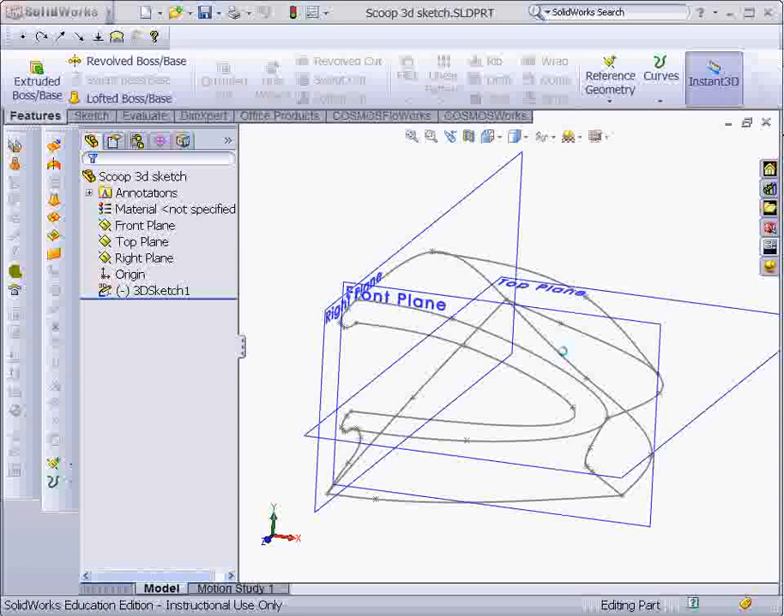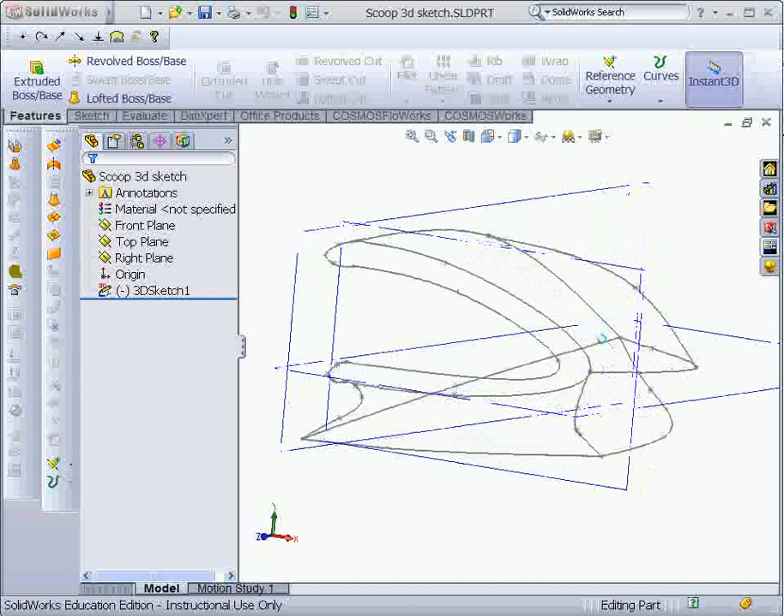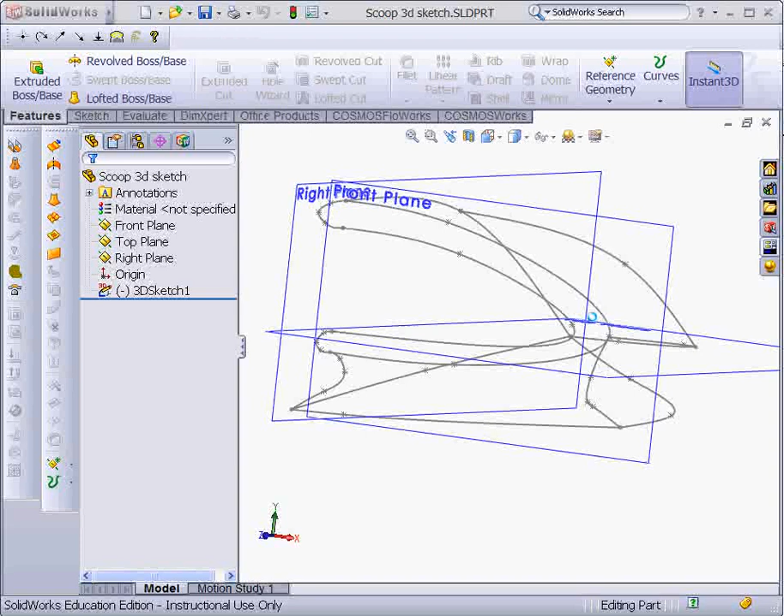We're going to go through the process of creating a surface body from the sketches in the 3D sketch part for the scoop. So at this point you should have created several 3D sketches. With surfacing, there's an art form to this. What we're looking at here is basically a 3D sketch that has half of the final hood scoop form in it. And we're going to use this sketch to create a bunch of closed sketches, and then we're going to use the surface fill tool in order to generate the surfaces.

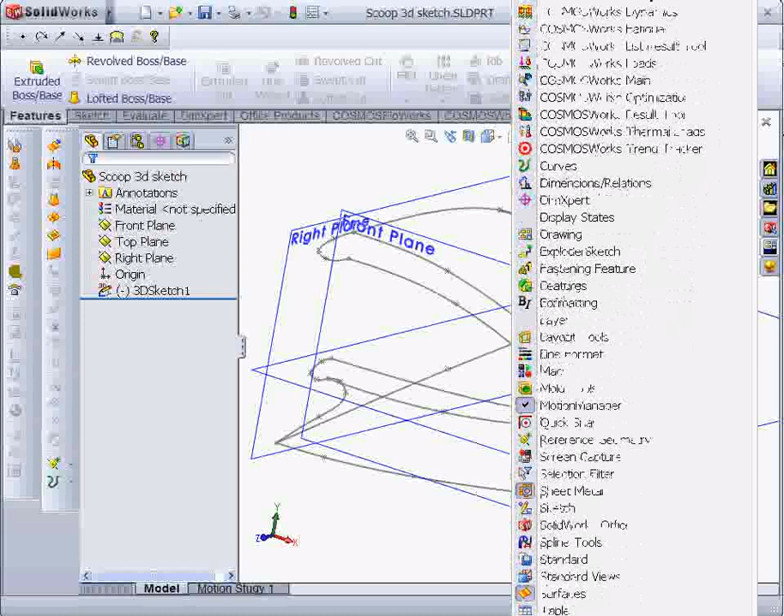So my surface menu is turned on over here. If you don't have that, you want to right click up in the menu area and scroll down. At the bottom there'll be an arrow that you can adjust, and then there's surfaces. You want to have that toggled on. That'll put the surface menu over here. This filled surface tool is the tool we're going to use to do most all of this. We'll then use the knit tool, which is not available to us now because we don't have more than one surface.

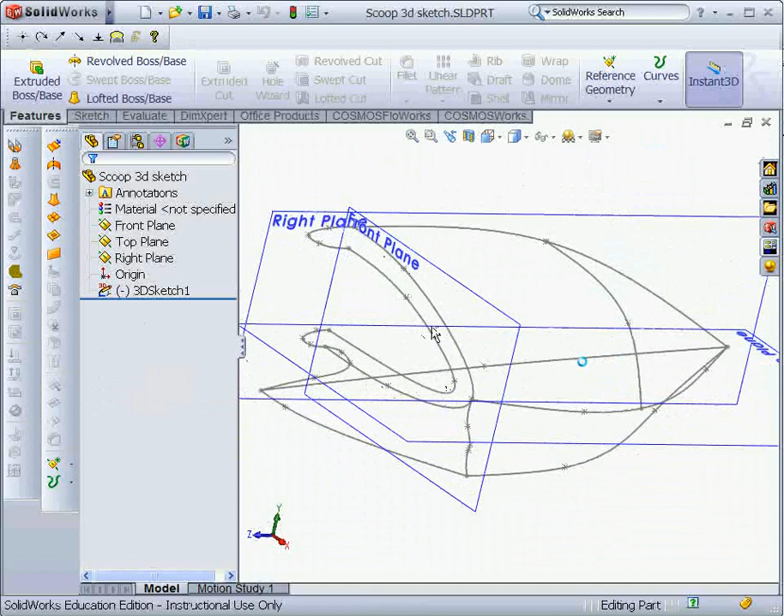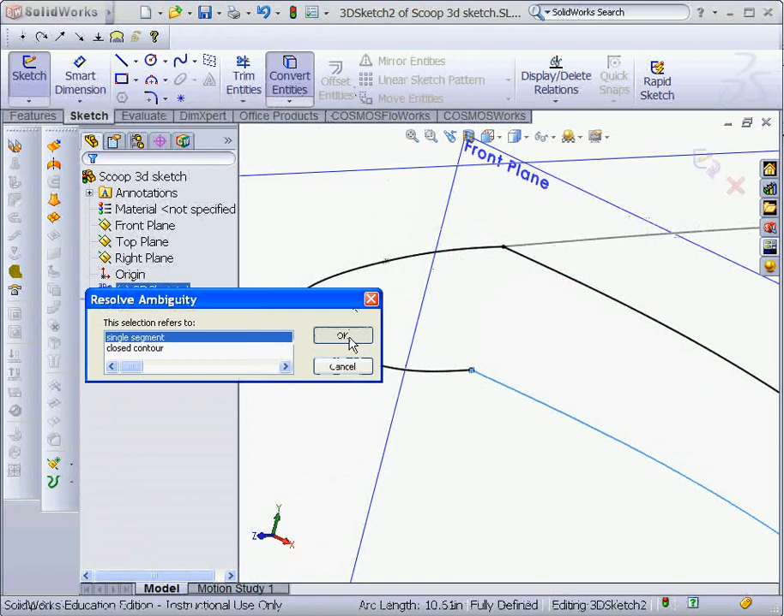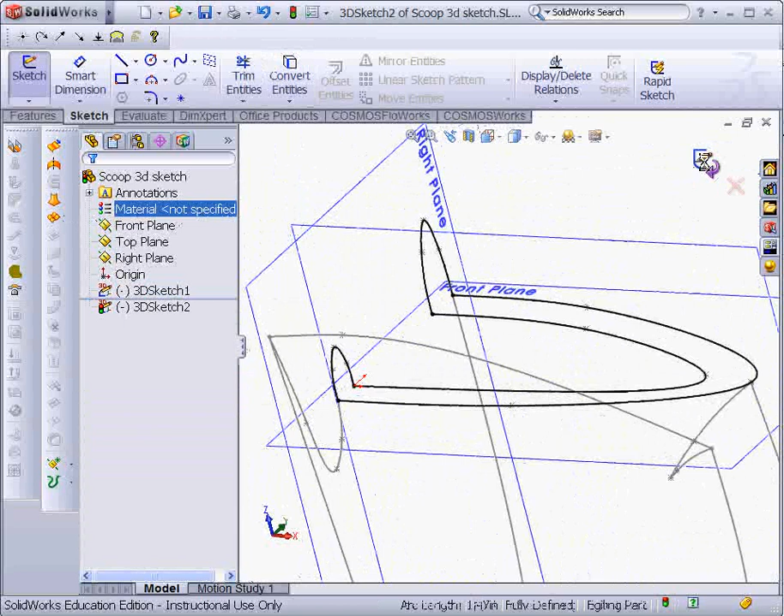So for each surface we're going to create a 3D sketch that bounds the surface that we want to use. So the way I'm going to do that, I'll come up here, get sketch, select 3D sketch. Then I'm going to use the Convert Entities tool to bring the sketch entities into the 3D sketch that I want. So right now I'm going to do the rim around the mouth of the hood scoop. So notice I just did single segments there instead of it trying to do the entire contour. So I have one single closed contour. I'm going to exit the 3D sketch. Now if you notice, I have two 3D sketches over here.

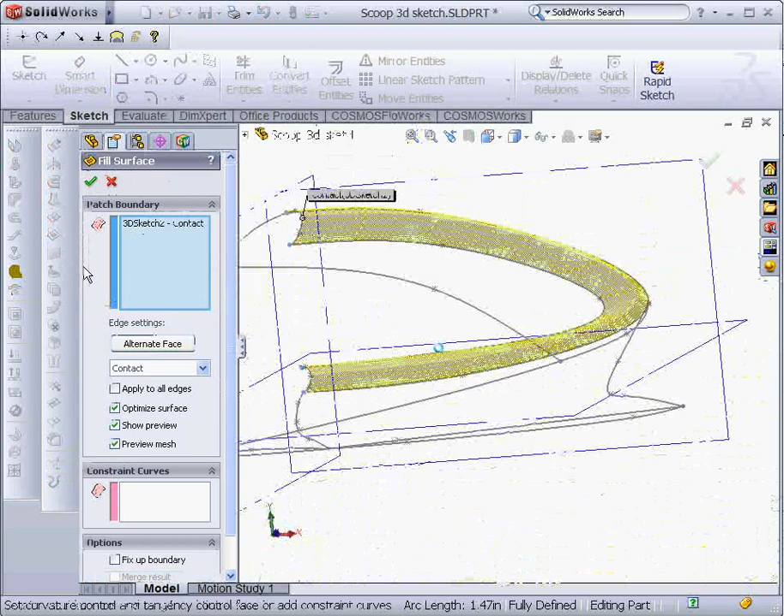With the second one selected, I'm going to click the fill surface icon. It'll take a moment because SOLIDWORKS is fitting a surface to that. And basically what we have there, if you can imagine kind of folding a piece of paper and then bending it in half, we've created that surface. SOLIDWORKS basically maps the surface out using these end contours and the sides. So we're going to check OK on that, and that's the first surface we've created for this part.

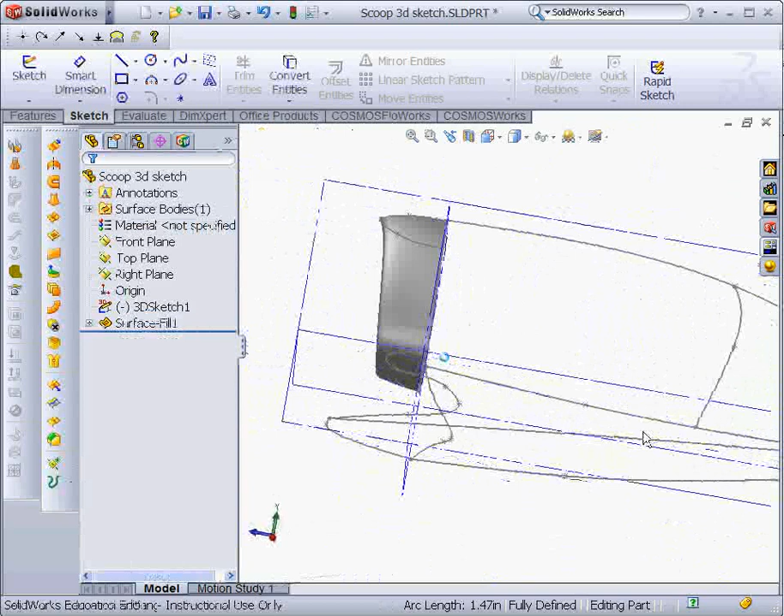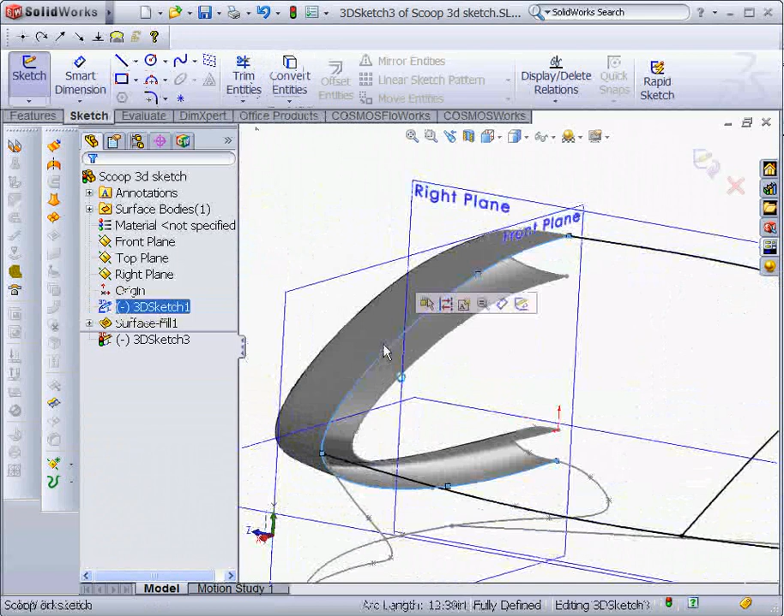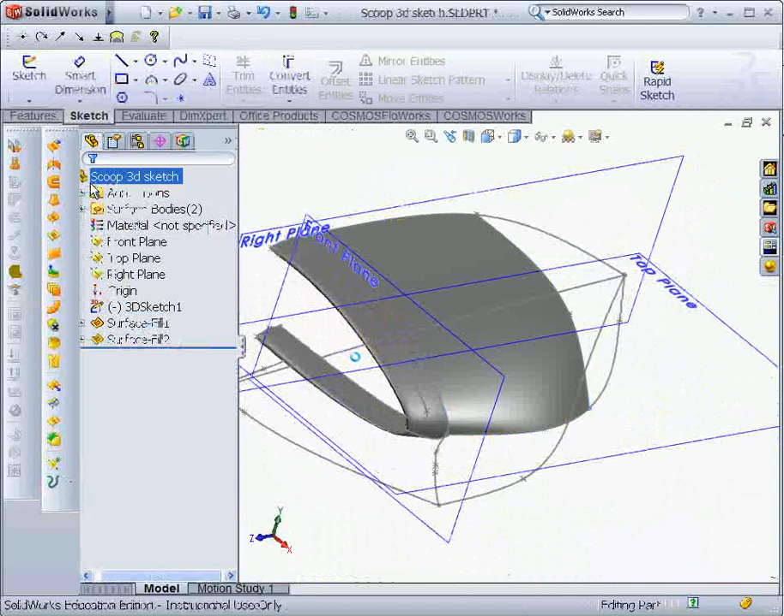The next one I'm going to do is this top surface here. So the way we're going to do that, we just continue this through the part. We're going to go to 3D sketch. I'll click on that edge. Convert this edge. Convert this edge. And convert that edge. And trim those out by clicking on them. Leave that. Click again, and you can see more of that surface is put in. So now I have two surfaces. If I click on the surfaces, they show up as two different surfaces over here in the feature tree.

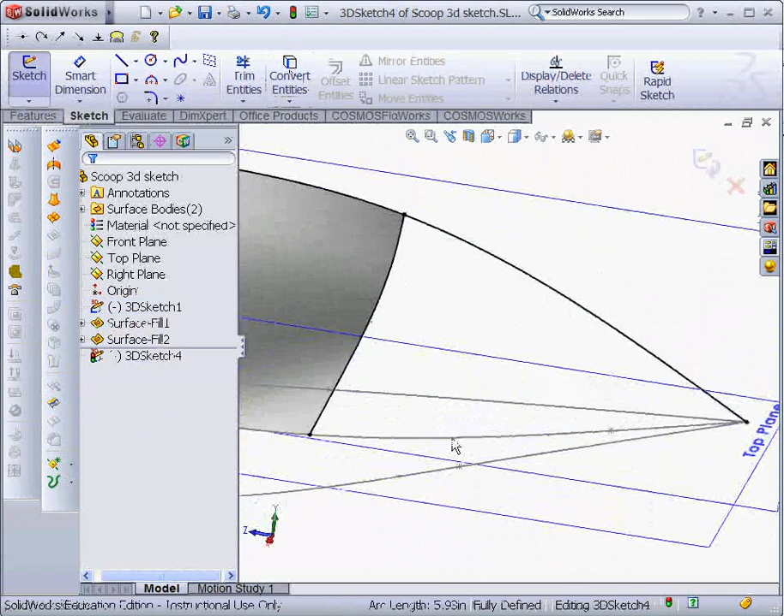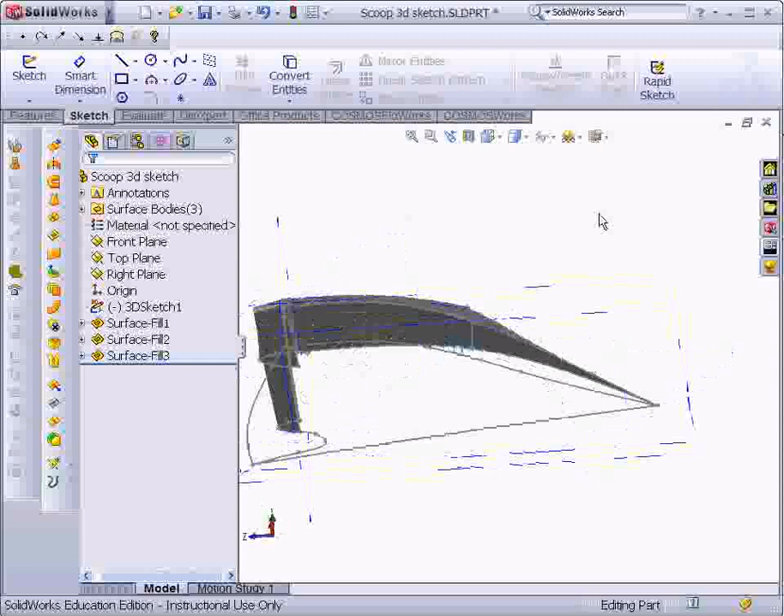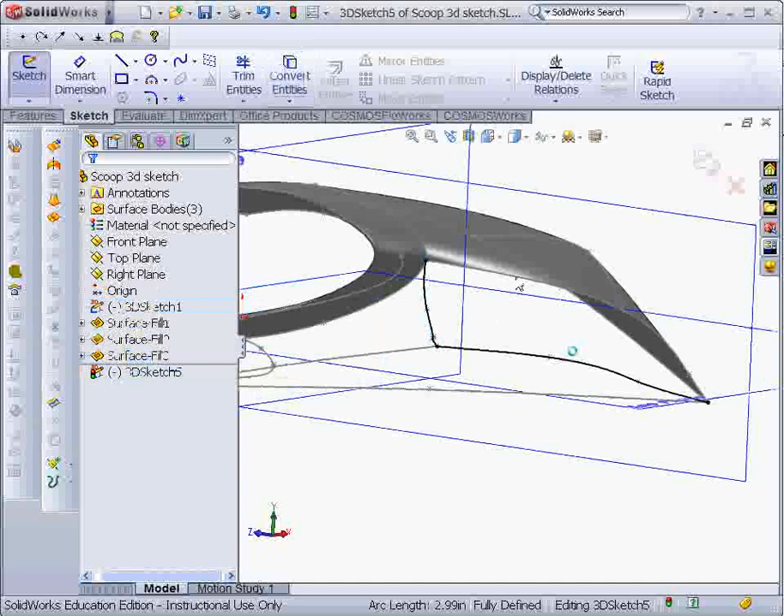This last surface, put it in the same way. Exit out, hit the fill surface icon, and then we fit a surface to that. So now we have three. Two or three more and we'll be done. 3D sketch. Convert each of our segments again. They're all converted. Leave the sketch. Do our fill surface.

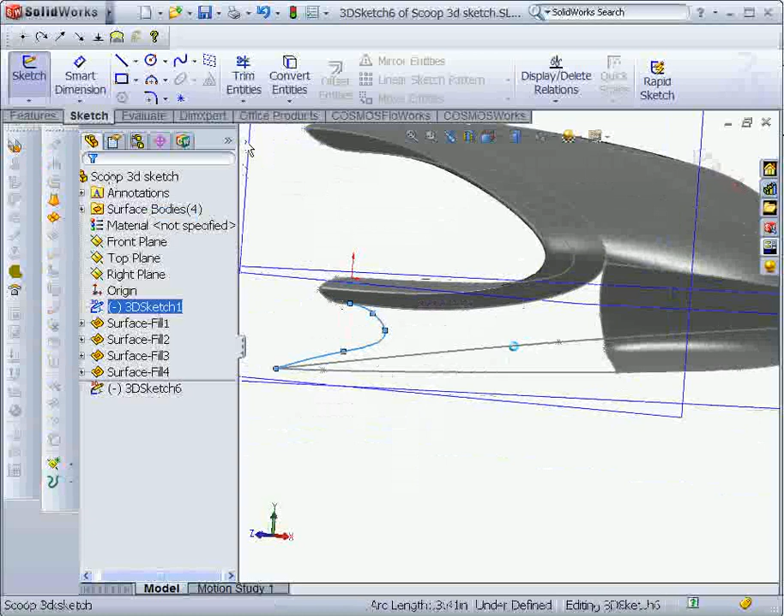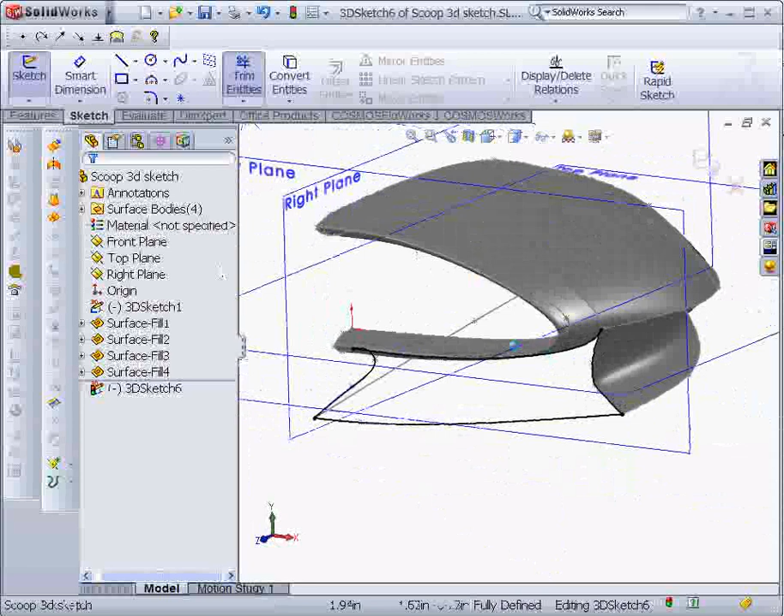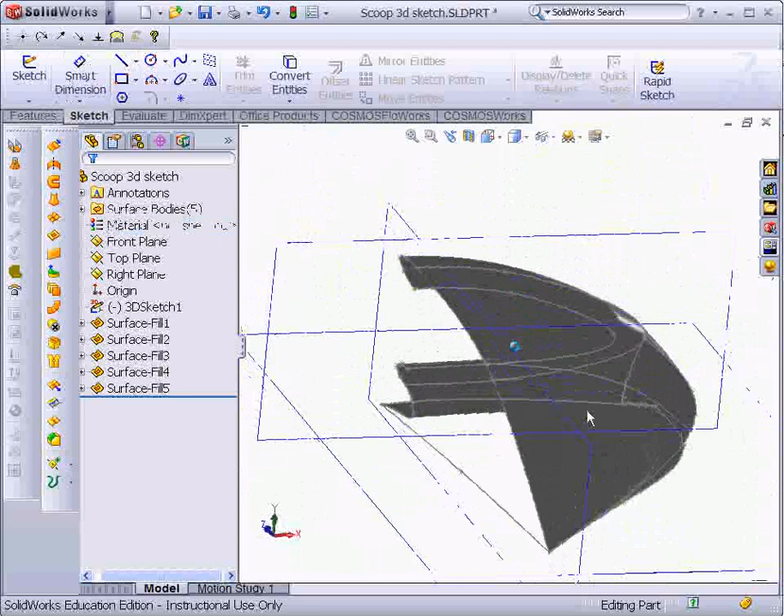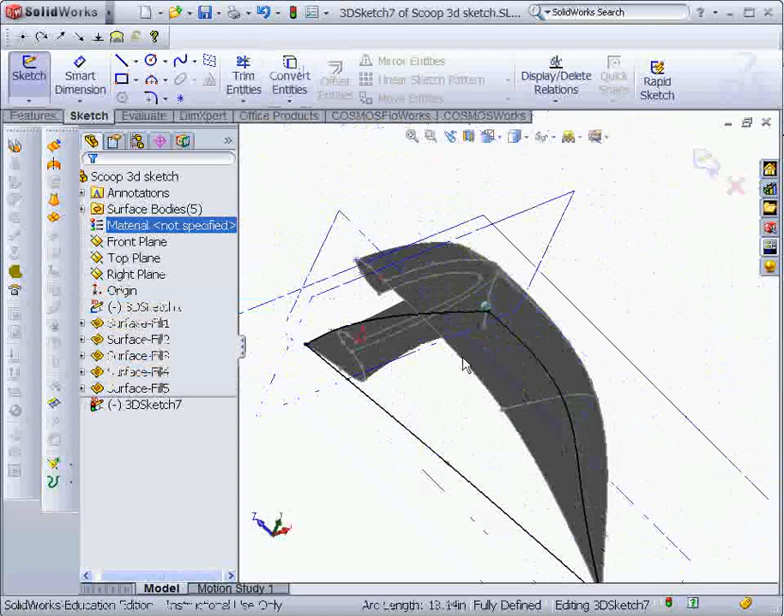3D sketch again. Trim. Everything should be good with that one. Leave the sketch. Fill. And you might think you're done, but we're going to do the bottom as well. So for the bottom, we want to do 3D sketch, convert, convert, convert, leave that, fill that in. So that's complete.

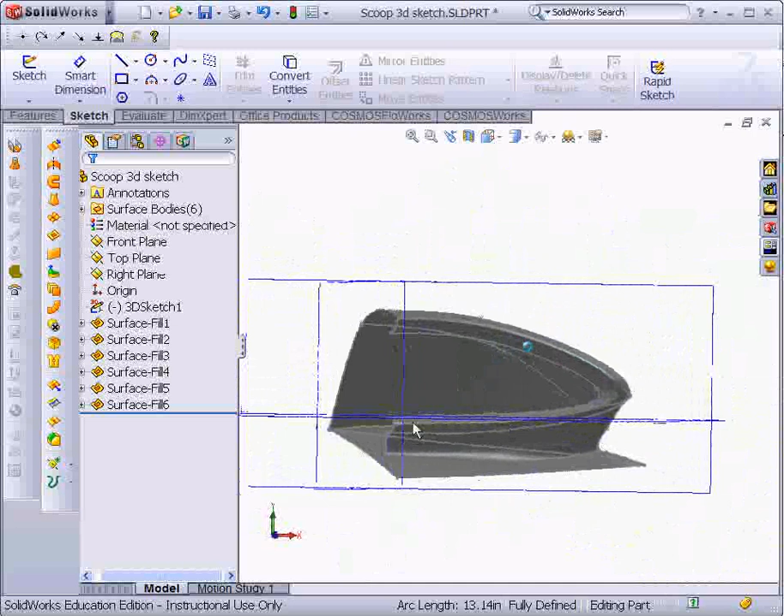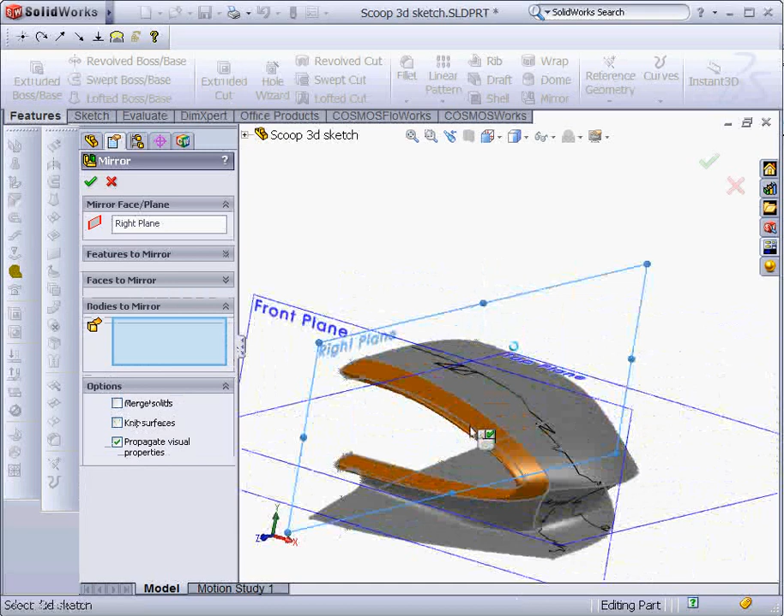Now, I have half of this. I have a whole bunch of surfaces, and I want to get the other side. So I'm going to go to Features, Mirror. I'm going to select this plane. Then I'm going to go to Bodies to Mirror. It's going to treat each surface as a separate body. So we want to select all of our surfaces. And you see we create the other half of the scoop that way.

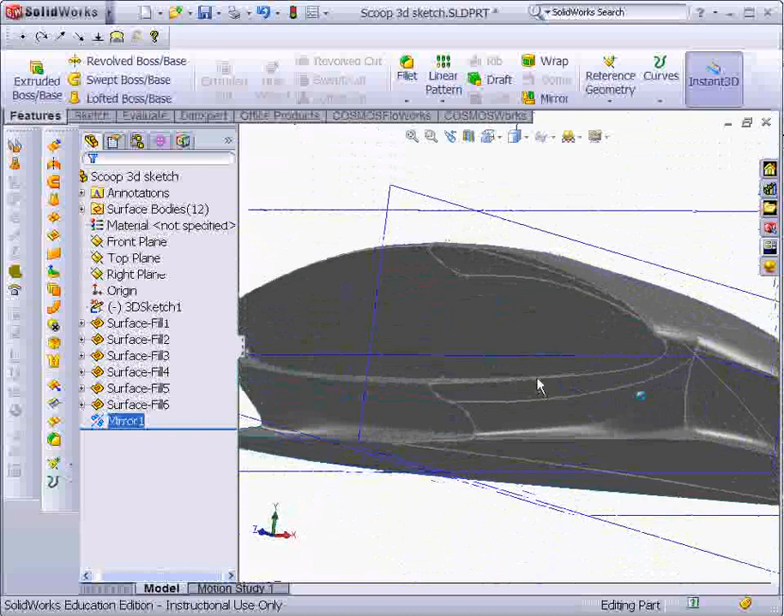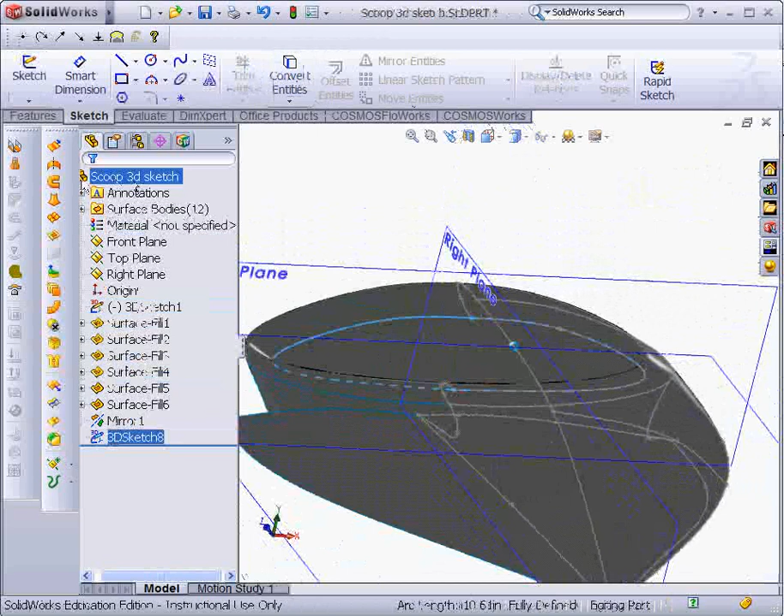Then I also want to do a surface fill operation. So the last thing I'm going to do is fill in the front face of this. So I want to go back to Sketch, 3D Sketch, convert that edge, and this edge, exit, and fill. So now I've got a completely solid hood scoop. Not much air is going to flow through it with it being like that. That's okay. It's a whole bunch of surfaces.

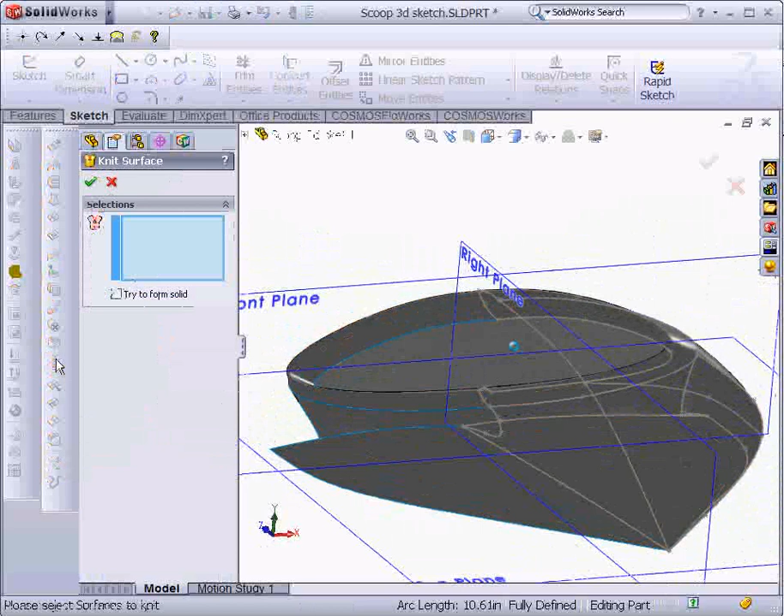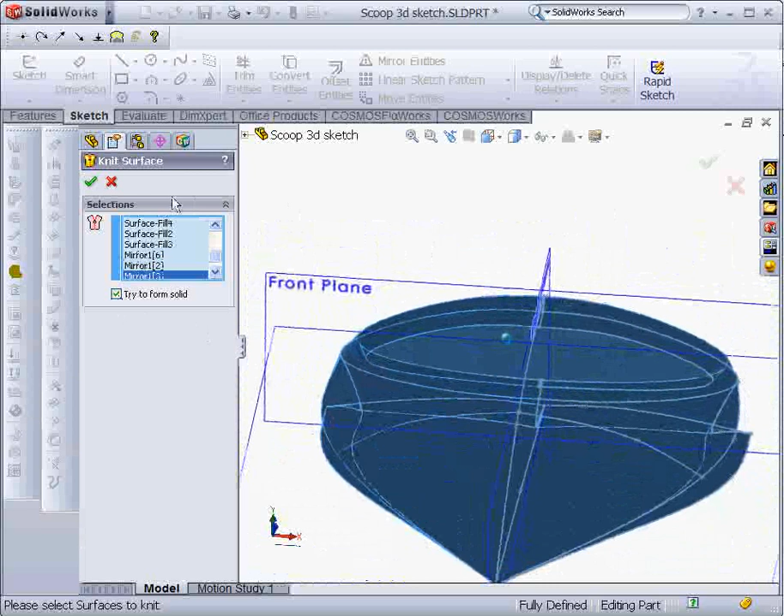The last thing I'm going to do is knit them all together. And I want to select all my surfaces. And I want to select Try to Form Solid. Okay. So let's see if it works. So this is showing up as blue inside, so that means it's a solid. And turn my section view back off.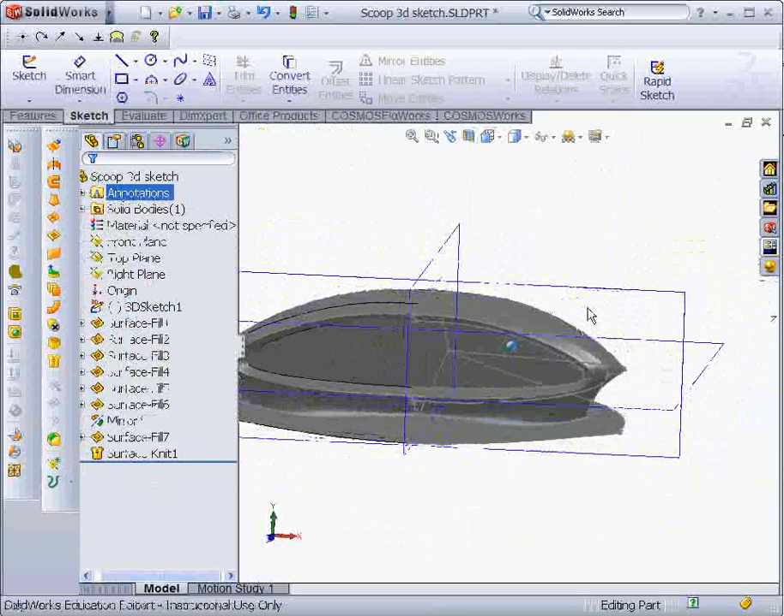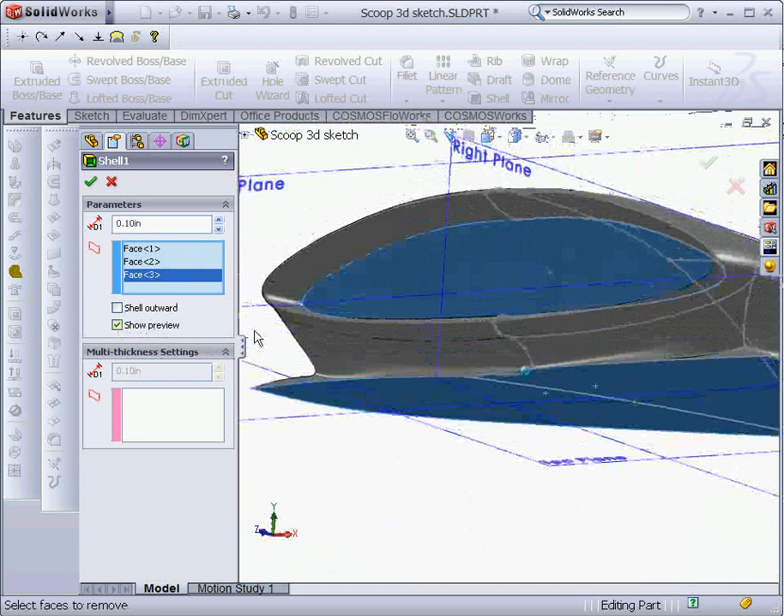So now I'm going to go over to Features and I'm going to shell it out. And I want to shell out that portion and the bottom. So show preview. I probably will have to drop the thickness a lot in order to get this part to work. So preview's not working. I think I need to go down to like 30 thousandths. There you go. So there it's shelling it out to about a 30 thousandths thick piece of carbon fiber.

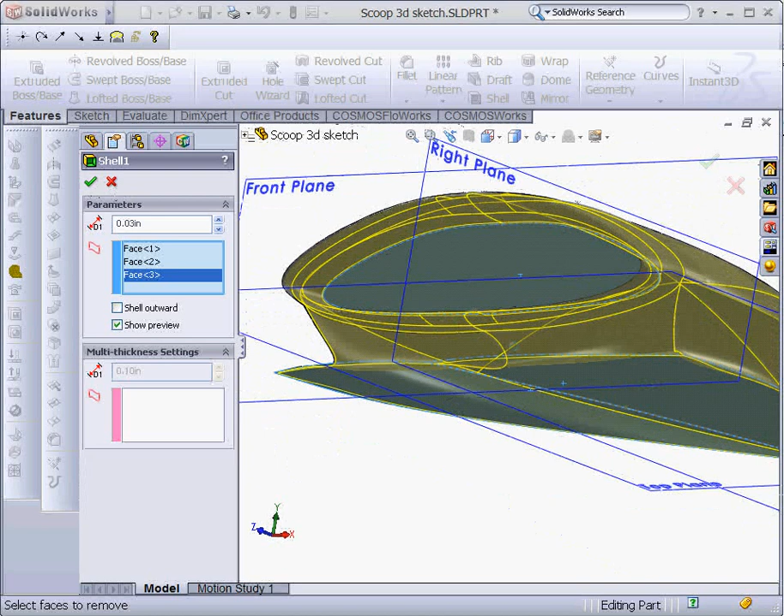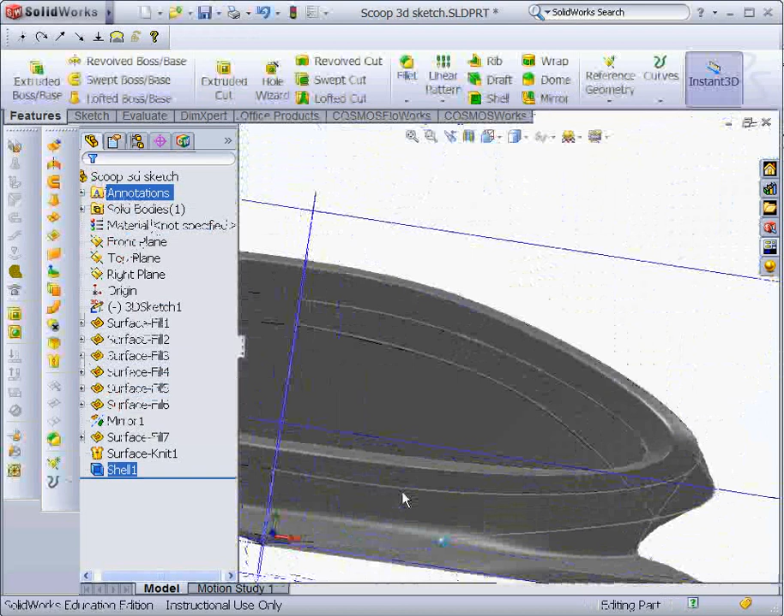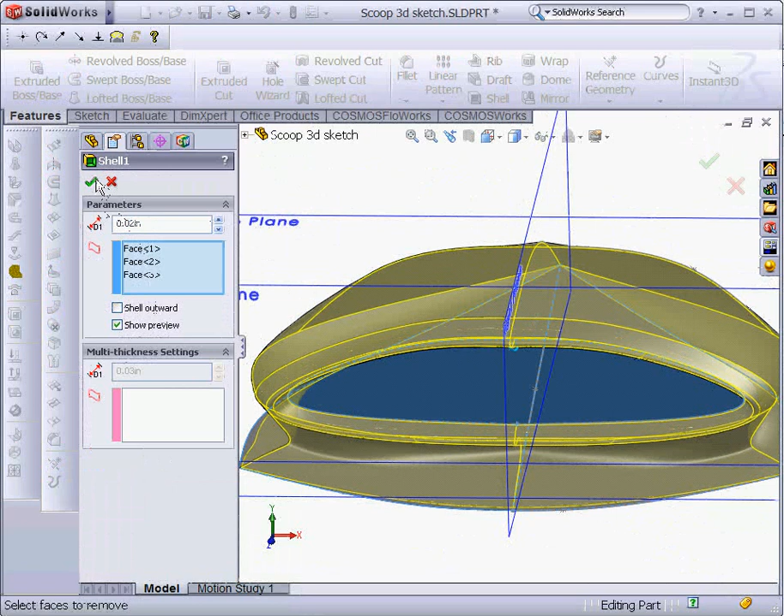Okay, it did give me a radius of curvature warning, so you could have to drop that down a little bit further, but the geometry basically seems to be okay. So you could drop it down a little further on the shell. Go back in and edit the feature. Then we'll drop it down to 20 thousandths. Okay, so that is creating the 3D surface model in SOLIDWORKS.